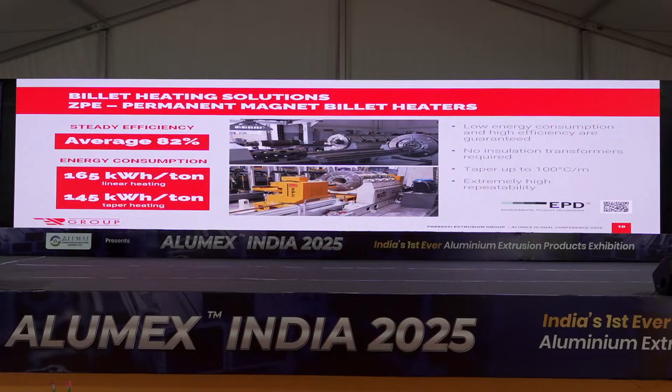The concept of this system is basically to create current inside the aluminum billet by moving, with a motor, the permanent magnet elements, poles that we install inside the motor. So rotation of the magnetic field around the billet creates such a current that by the Joule effect rises up the temperature and heats up the billet. That is a guarantee of uniformity of the temperature from the skin and also inside, so we can guarantee accuracy and very little difference between the temperature of the skin and the inside.

This is real data we take from production, measurement of the deviation of the temperature billet to billet. You can see the repeatability is within plus or minus 2.5 degrees. If you have further questions about this new technology, we can answer them later.

Then I would like to speak about one of our main products. Presezzi Group started manufacturing presses 30 years ago, and we continuously innovate our press. We are proud to say that our press integrates an energy saving system that is based on reducing energy consumption by using a different hydraulic system, a different concept of modulating the flow of oil on the press. That means lowering the energy consumption of the press up to, in some cases, 50%, which lowers the operational cost and makes a more sustainable extrusion process.

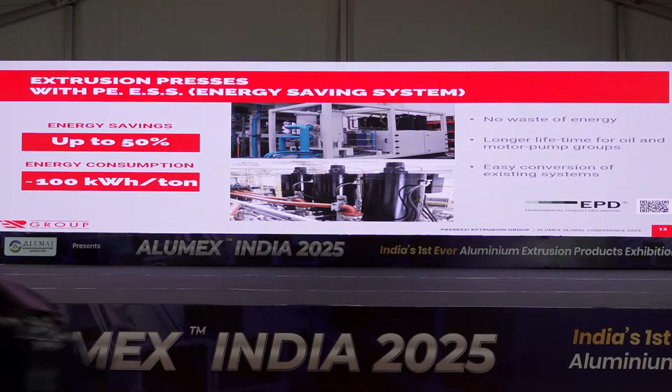So we have about 100 kilowatt hour per ton consumption of our press. It's a very compact solution, no waste of energy. The pump has a longer life because we are able, with this combination of fixed flow pump with a servo motor, to switch off the pump when it's not needed, and that increases the lifetime of the oil and also of the pump group.

Behind the press, we also design fully automated handling, packing, storage, including AGV robotic line. I believe that in the future this will be necessary also for the Indian market, to have more automated extrusion lines with the possibility to reduce, not now but in the future, the number of workers, and to guarantee a process with better repeatability, without failure, without scrap. Automation is a part of that.

Here you can see some of our systems for packaging lines, warehouse of profiles, warehouse of bundles after powder coating, ready for dispatch. We also have automatic packaging lines with robots that we have already provided to European customers.

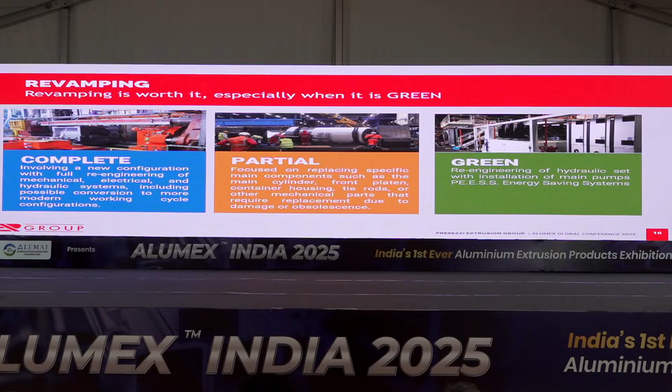Together with the design and innovation, we also keep constant focus on offering the customer upgrades for existing presses, where we can re-engineer and reduce the energy consumption. So we can offer press revamping with installation of energy saving systems on existing presses.

Revamping ranges from system upgrades to component renewal, PLC and software upgrades to the latest technology, and data acquisition, a system to control the process by adding sensors that monitor the machine in real time and store the data in a database.

And then, non-destructive testing for the structural assessment of the press and forgings. That's another service we can provide, for guaranteeing safety in the long term for your equipment.

Here you can see also a list of equipment that we can provide for offering a complete cast house: double chamber, single chamber melting furnace, smart camera system to monitor the aluminum bath inside the melting oven, fume treatment, refining, and casting launders.

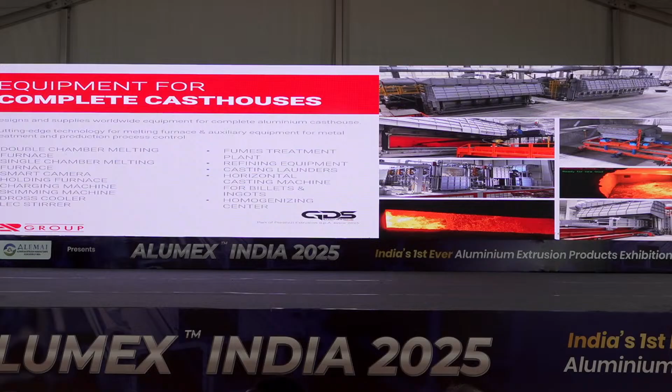This is all part of our product. We also offer, together with the extrusion line, automation software that we call Data Manager Suite, which is able to do data collection, planning of orders, raw material management, production tracking, order management, quality control, and process control. That's also something you must think about for the next innovation in the Indian extrusion line, and it's part of what we integrate in our offer.

Special focus on the service that is mandatory to maintain a relationship with the customer. We can offer service directly in India with our local specialists from Italy, USA, China, and Turkey, where we have different locations and bases.

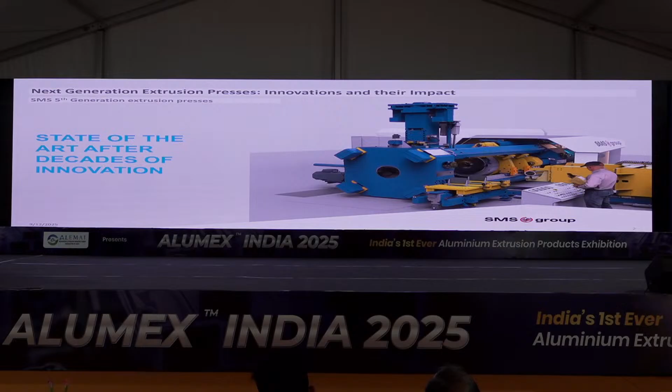On the right side of this presentation you can see our next generation presses. I will tell you how it is different from the older generation presses, and why we are calling it a fifth generation press.

Okay, so in order to give you a small glance of what we meant by fifth generation. This extrusion technology is quite old, but we are optimizing the process, streamlining it further in terms of better availability of equipment, reducing carbon footprint and energy saving.

If you go on the right side, the first technology was the backloading presses, called the backloading long stroke presses, in which the container goes on one side, the stem on the other side, and the billet is loaded in between. The total press frame was quite long, and that's why these are called backloading presses.

Then the generation improvised, and we came to know about the second generation of presses, called stem shifting. In stem shifting presses, the stem shifts to one side, but it is still a backloading press. However, the total length of the press frame is much smaller than the older version.

The third generation presses, which are still very popular in the market, is the front loading press. The advantage is that the billet is loaded from the front side, while the stem and container go on the other side, and you maintain the center line of the billet along with the entire center line of the extrusion press. So these are the three generations of extrusion presses very popular in the market.

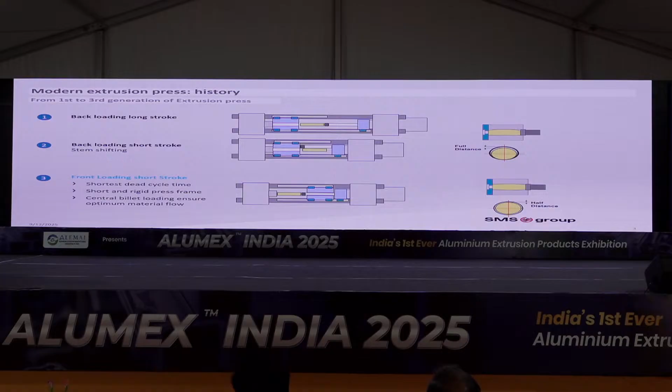In the past, we have worked on the fourth generation presses, and today I'm going to present the fifth generation presses as well. But let's talk a little bit about the fourth generation presses from SMS.

But before we go to the fourth generation, we thought, how is SMS unique from the rest of the manufacturers? So what we do in our presses is provide a complete laminated rod structure for the press, and this gives you an unmatched lifetime of the press instead of round nut and columns.

This means that over a period of time, the rods which you put into the press to make the frame as one unit have to be replaced. Also, in the thread configuration where the thread and nut are tightened, the area of contact is very less and the notch factor is very high.

In order to overcome that problem, SMS has come up with a unique design of laminated tie rod, and we put big keys which give a bigger surface and a low notch factor. So this is one of the unique features of the SMS press, which helps you get a more sustainable press.

We have been making these frames since 1970, and more than 600 presses around the globe are in working condition. The major point we want to highlight is that there is no breakage of this frame in the last 40 to 50 years.

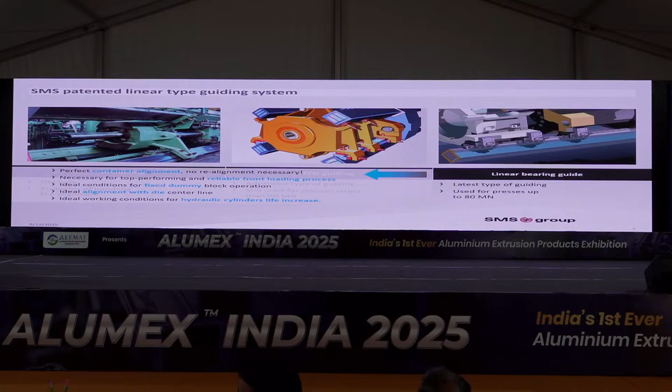Along with this, if you have this kind of system, you get very good central alignment with the dies, and you always try to use the core aluminum from the billet. So these are some of the advantages with our system.

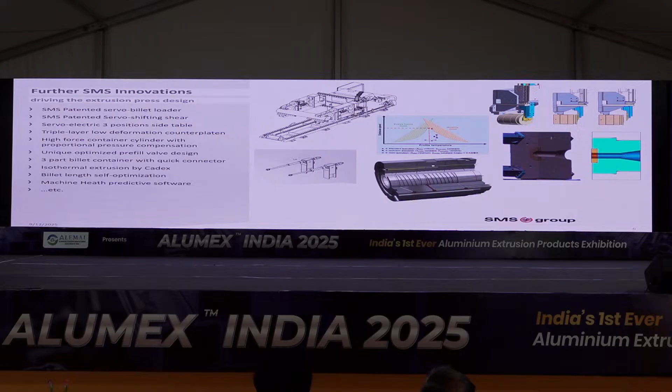There are some more advantages which I tried to put in a nutshell in this slide, but let's talk about a few, because I only have 20 minutes. Sorry for that. But if you want to know more about SMS presses, we also have our booth inside the exhibition, and you can come and visit us.

The major advantage with SMS is that we are not using linear guides only in the press, but also in the billet loader, as well as in the side cassette, so that the complete alignment of the press remains towards the central line of the press.

We would also like to talk about the servo billet loader. It's a latest development from our side, which is very energy efficient with precise control of the press. Along with that, we also have our servo shifting shears and our 3-position side table.

We also provide a pressure compensator and high proportionate force into the presses. Also, we have our in-house container designs, and we provide a software called CADEX, which stands for Computer Aided Direct Extrusion. It's additional software which helps you achieve isothermal extrusion while doing the extrusion. This software can be implemented along with the machine or separately.

So we have talked about the 3rd generation presses and their advantages, which SMS makes in-house. Now we will talk about the 4th generation presses, called Hybrex. Hybrex stands for hybrid extrusion, and it has some major advantages. The design is very compact, and we got the German Design Award for this press in 2017.

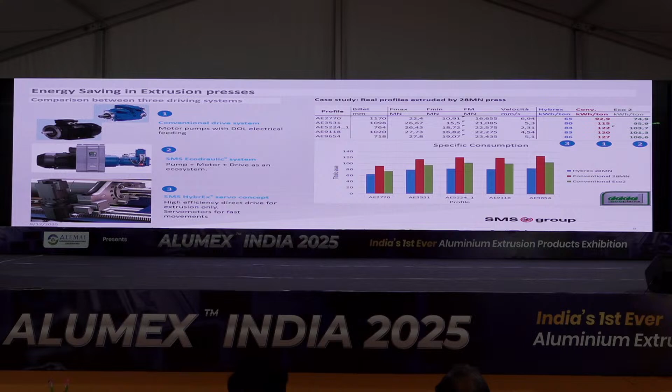The normal presses come with conventional drive, but we can also provide an SMS eco-hydraulic system on top, which can replace the old generation conventional system. This is a live case study for a 28 meganewton press across all 3 types of technology. In the middle, you see the conventional press; on the right is the eco-hydraulic solution, point number 2; and point number 3 is the 4th generation press with Hybrex.

If we compare a profile size of 1170 millimeter billet with 22.4 meganewton of force, with conventional presses the power consumption is 92.9 kilowatt hours per ton, whereas it's around 20% lesser in the eco model. And if you go with the Hybrex, it's around 30% lesser in that model. This is how we compare internally in-house, and we evolve the technology also.

So with this, I think the four generation presses are clear to you guys. But this 4th generation press with Hybrex, with the electrical movement, these presses were a little expensive. We got feedback from the market asking why we don't think of a combination of hydraulic and mechanical presses. So that's why this is a new development going on in SMS. The first prototype is ready and we have already filed the patent. We are just waiting for the patent to be confirmed, and then these presses will be ready for the market to sell. So what is the advantage of going with the 5th generation of extrusion presses?

In the past, we have seen that the press is always moving on the hydraulic system, and we have hydraulic working in the hot zone also, either the discard shear, the bolster shear, or even the side cassette. This is the hot zone wherein always the hot metal or hot aluminium is working. So what we did with the 5th generation presses is we tried to completely obsolete the hydraulic system in the hot working zone. The entire hydraulic system will be much smaller than the conventional presses.

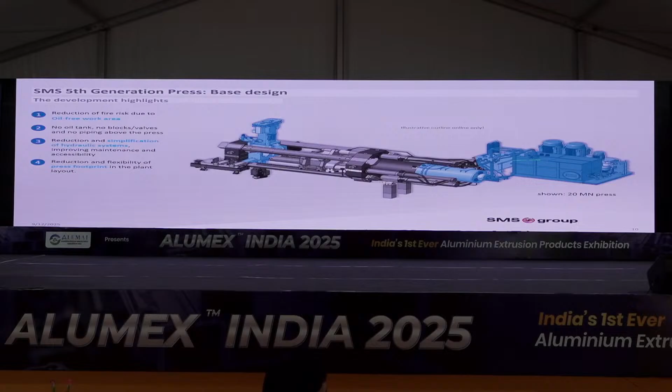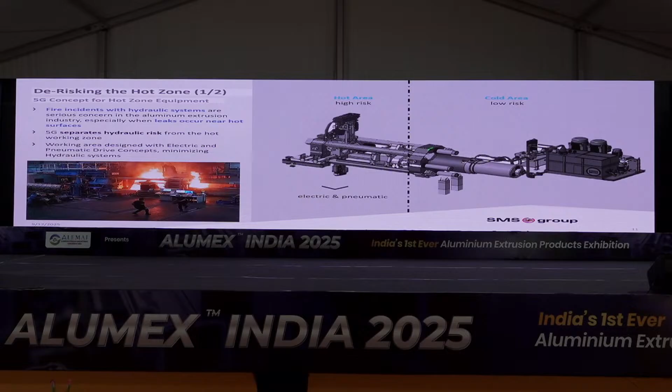That's why we came up with the idea and created a line. After that, there is no movement of oil wherein the hot aluminum metal is working. So we have made a cold area wherein the tanks, the side cylinders, the main tank and a compensating cylinder are working. In this area, we have come up with the idea of an electrical shear with a pneumatic push-off for the discard. On the bottom also, we are providing a similar type of technology, but this is optional. And also for the side changing cylinders, that is also an option - you can go with hydraulic or you can go with electrical drives also.

So as you can see, the idea is very clear: whenever there is a leak near the hot area, it has a tendency to catch fire, or you have to use an oil which is fire-resistant, but then the cost of investment for the consumer is very high because your OPEX cost will be very high in that case. So that's why we came up with this idea.

So you can follow the numbers 1, 2, 3 and 4. The first is the electric shear, wherein we have completely obsoleted the hydraulic cylinder from here and come up with the solution of the electric shear. This electric shear also has a pneumatic cylinder which can be used for the discard push-off.

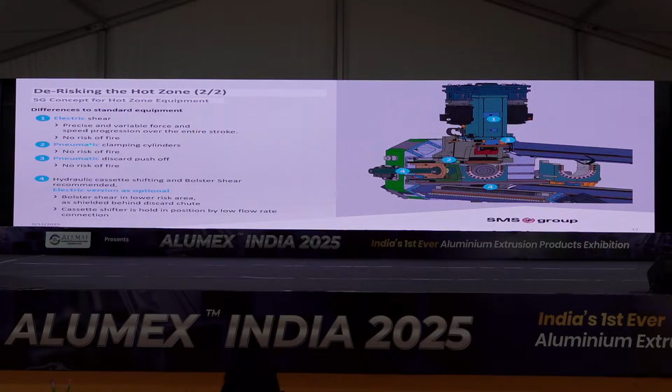Then we have the pneumatic clamping cylinder in this area for the dies. We are working on that technology right now. As I already explained, we are working on it and the first model of this press is completely ready, and we are just waiting for the patent to be confirmed so that there is no oil required for the die positioning also. When you take a shear cut, you have to hold the die against the clamping cylinders - that will also be completely obsolete.

Then the third is the pneumatic discard push-off, as I already explained - the push-off of the discard will be pneumatic. Then the fourth is an option, but we prefer that when you are investing in such equipment, you can also think of buying a bolster shear, which operates from the bottom, and also the cassette shifter.

So this is the mechanism of how we are operating the press. I will present this with the video.

We have a compensating tank on the bottom backside. This is used to pre-fill the tank, and the main pressure is coming from this pink pipe while the back oil of this compensating tank is going to the tank for cleaning. When the cycle is finished, the entire oil from this side comes to the compensating tank. We store it for some time before the next cycle starts. As soon as the next cycle starts, fresh oil from the pink pipe comes in, and the oil in the reservoir at the back goes to the tank for cleaning and cooling down. With this technology, we have a very reduced space, and the footprint of the machine is also reduced.

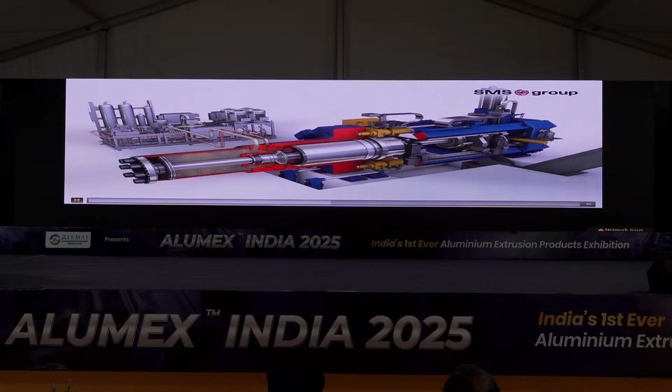Together with this, we are also working on making the tank smaller, but the efficiency of the tank has to ensure the oil is cooled and there is no turbulence in the oil. That's why we have divided the entire tank into three portions: one is our degassing chamber, second is our suction chamber, and third is our return chamber.

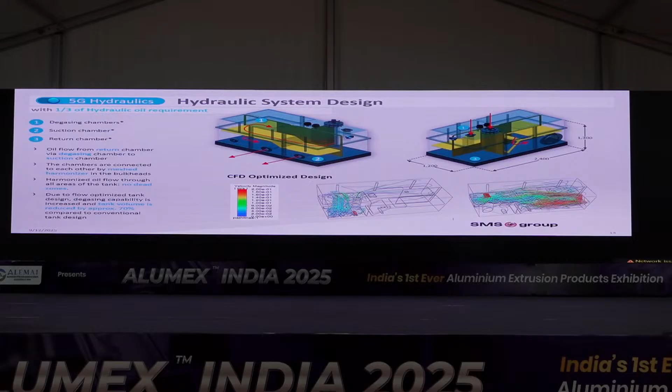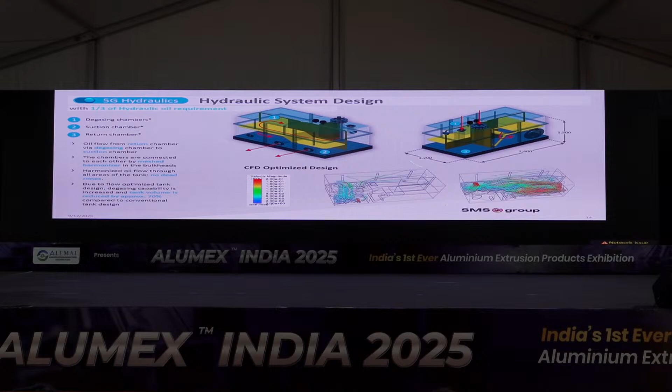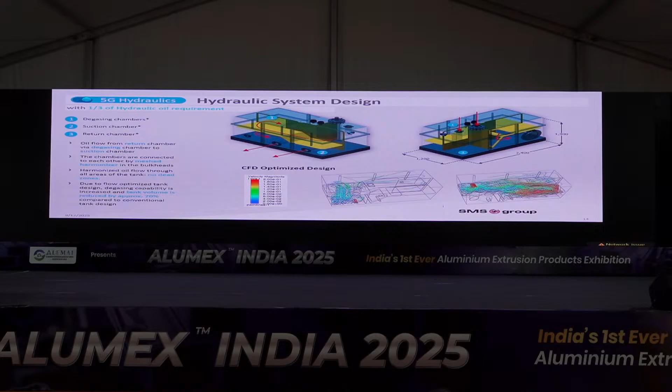When the oil is coming back and falling down inside the tank, it creates a lot of turbulence and bubbles. That's why all three chambers are connected, but the return chamber is separated by a membrane, so that the turbulence and bubbles of that falling oil will not go to the suction area, and no bubble will travel into the pipe which could cause cavitation later on.

So this is the complete thought process behind this: whenever there is oil, it first goes to the return chamber, then from return it goes to the degassing chamber, and from the degassing chamber it comes to the suction chamber. This is how we are working on this technology.

As I explained, for generation 3, 4, and 5, just a very quick glance about the layout. If you see the layout of a third generation front-loading press, there is a press area which is a conventional design, then on the second side there is a tank which is overhead along with railings and staircases, and third is the hydraulic drive system on the back side of the press. To overcome that big space requirement...

...this was the Hybrex design. Again, the tank from the top is completely obsolete, but if you see the side movements of the press, it's with the electrical drive. In this area, there is still some oil required for the shear, and the tank and pump station were quite complicated because we are dealing with a lot of pumps in this case and also with servo drives.

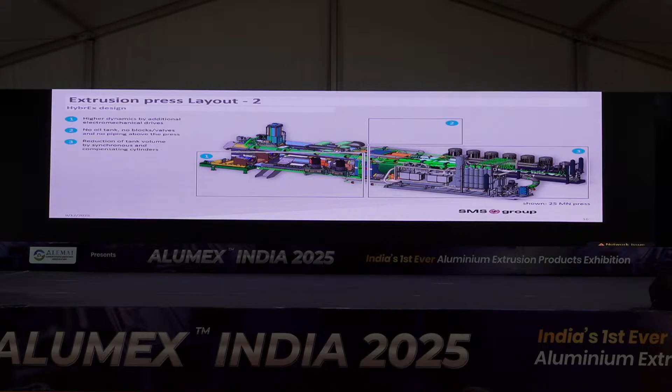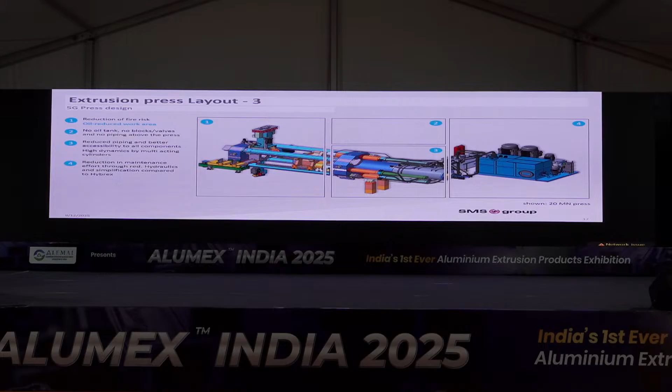So this was the fourth generation, and now we will present the fifth generation presses. In fifth generation presses, now you will see there is no tank on top. The hydraulics are much simpler, and the tank unit and valve stand are also much closer to the press, which gives better reliability and reduces the overall footprint of the extrusion press.

So this is the second-to-last slide in our presentation. As you can see, a normal conventional press with all this piping structure, valve design, and pump stations looks very complicated, whereas in a standard 5G press from our side, you can see this looks much easier to handle, with a small tank, a compensating tank, and electro-servo drives.

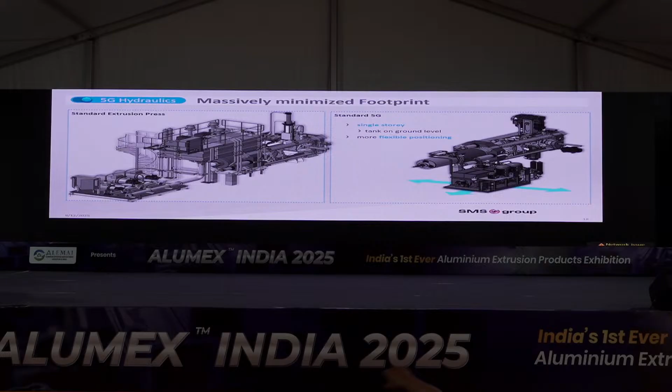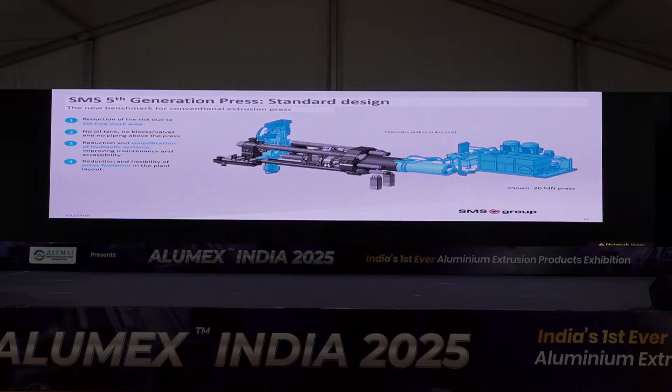I have already explained the concept. The first area is to work completely in an oil-free area in this press. Then there is no tank valve block on top, which makes maintenance very easy. With the reduction and simplification of the hydraulic system, it is very easy for maintenance, and operating the press is much faster. Overall, land is becoming a problem day by day and getting more expensive, so the overall footprint of the press will be around 20-25% less than conventional presses.

With these new Hybrex or Hybrex 5G presses, there are options we provide, such as further reducing oil-related equipment by replacing the side cylinders with electrical drives. Also, you can use the high efficiency of Hybrex technologies, meaning the hydraulic system of Hybrex can also be put into these kinds of presses, and you can enjoy the shortest dead cycle time ever in your presses. Dead cycle time is basically the non-productive time for an extrusion press.

So now, as soon as I click the button, you can see what I meant with the new Hybrex. You can obsolete these cylinders from the side, and the movements will be from the electrical drives in this case, which will further reduce the hydraulic oil consumption in the overall press.

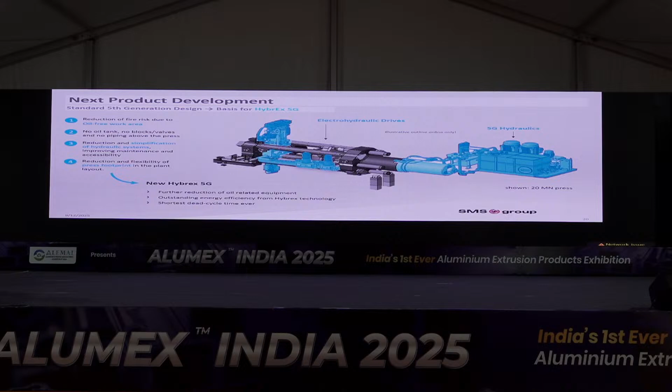So in a nutshell, what we want to say is that we already have state-of-the-art SMS standard presses along with the Hybrex model. But in combination of these two presses, you can pick and choose and make your own 5G recipe, whether you want to go for standard 5G presses with the hydraulic system, or if you want to obsolete the hydraulic system for the side cylinder and container shifting system, you can also choose that as a Hybrex 5G.

So we provide complete full flexibility when you are choosing the options. With this entire system, there is complete de-risking of the hot zone, meaning the oil and the hot metal do not come into contact, less hydraulic complexity, improved footprint, meaning overall you get a very proven and state of the art design from SMS Group.

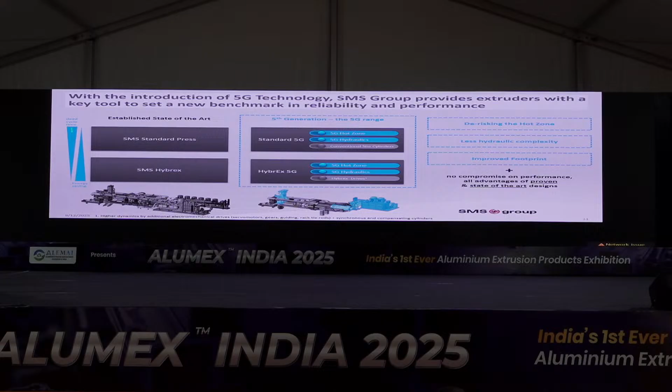And in terms of dead cycle time and energy saving, the better solution you choose, the less will be the dead cycle time and the more will be the energy efficiency.

So with this, I end up here with the presentation. Once again, my name is Mohit Agarwal from SMS Group. And if you have any questions, please feel free to ask me. Thank you very much.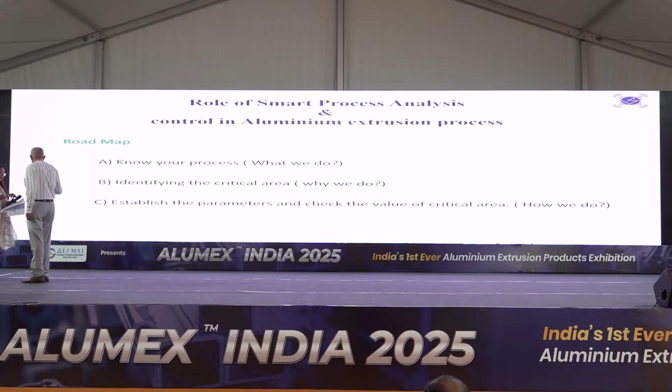You're okay with this? This is quite loud. This is the person. You can move this.

Good afternoon to all. Today we will discuss total data analysis and process control systems in the extrusion industry for extrusion industries.

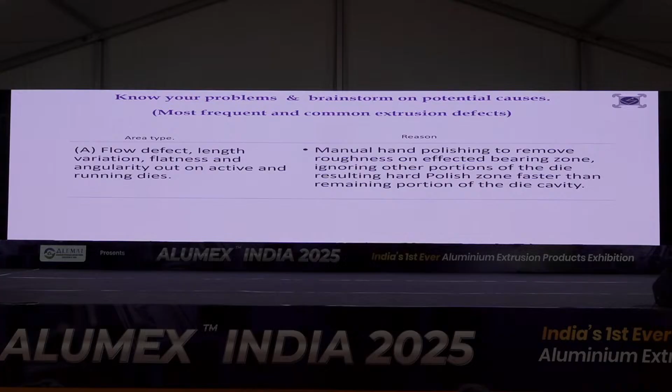So we have to avoid that. How we avoid it depends on the infrastructure of that particular extrusion plant. I'm not going into that part, because many extrusion plants may not have that, so they will look for other alternatives.

Next, relief exit—that is the most important thing to follow. Whatever we see as a joint mark, we call it a joint mark, but it is not really a joint mark. The joint is from the billet at the back of the die. What joint mark we find on the runout, extrusion runout, it is practically an oxide deposition or build-up just beyond the land area of the dies.

And if that land area is not very deep or adequately deep, then what happens? The same oxide rubs on the constant flow of the die, the product. So we have to be very careful on the relief exit also.

Second thing is bearing land area is not blended and is very sharp. When we cut a die, usually we try to balance the flow with the resistance. And that resistance we create either from the feeding side, feeding pocket side, or porthole side, or by increasing or decreasing the bearing length. So when we have a very abrupt change of bearing length, that blending is very, very important.

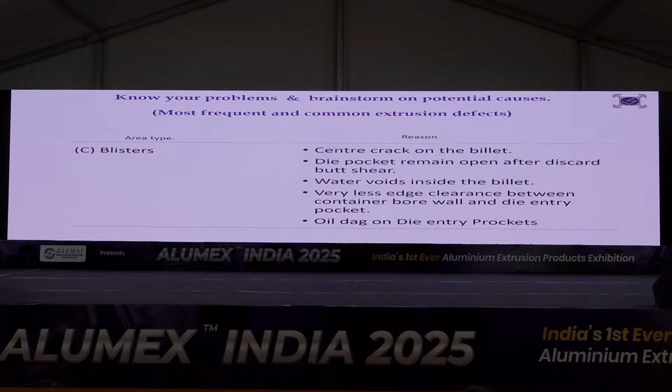Then we found the blistering problem. Blistering problem is very unique. We all know if there is an air interruption or entrapment, there will be blisters. So where does the air come from? We need to know the potential areas of air entrapment.

Center crack of the billet is the main culprit, the major culprit. Whenever we cast a billet, we look at the billet surface, but rarely do we have a look at the billet core area. Apart from finer grains, the center crack is also important. So we have to check, at least batch-wise, one billet from each batch of casting from the bottom, to see if there is a center crack—if so, we should not use that billet.

Now why are the cracks coming? That is a different issue, not covered here. If anyone is interested to know, we will discuss it later after this presentation.

Then the die pocket remains open after shearing. When your shear blade condition is not good, or there is a gap between your die and shear, or your die is shaking, or your discard is very long or very short, sometimes part of the pocket gets opened. And when the next billet tries to enter in that gap, there is air entrapment—that also gives you the blister problem.

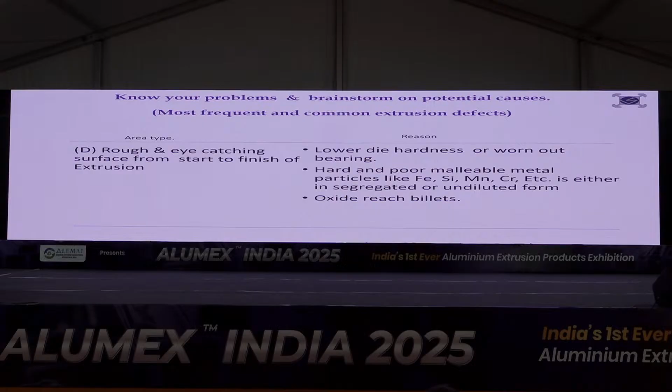That gives the most serious roughness problem. Oxide rich billet is another contributor. That's why during DC casting, whether with classical hot top or air slip, the oxide layer should be very thin on the outside wall so that the oxide part doesn't extrude through the die. Because aluminum oxide is abrasive by nature, it will create further roughness on the die bearing area.

Next comes metal tearing or crocodile cracks. In common language in our country, everybody says shearing, shearing, shearing. Shearing is what no one knows. They think the material is not bonding, so they just say shearing.

Shearing can only occur due to incipient crossing, beyond the incipient temperature level, which is around 80-85% of the basic metal melting temperature. At 70 to 72% of basic melting temperature, if we apply, the metal goes to plastic state. But the moment it crosses 80-85%, it reaches the incipient melting stage and the metal becomes a bit brittle, tending to lose its malleability.

Now there can be a question: if you preheat the billet at 490 or 480 degrees Celsius, how does it become more than 560, 565? It's because of constant friction in the container that escalates the temperature, and this escalation happens at the bearing point, which we call the exit temperature. That exit temperature should not cross 80-82%, 80% at least as a thumb rule.

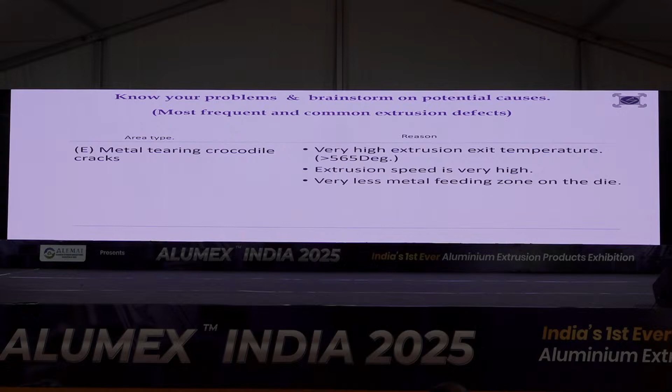Twist and bend, very simple. Either you don't do proper stretching or your die flow is bad. Sometimes the die runs faster on one side and slower on the other, and that will surely give you a twist and bend problem. Press alignment with reference to the stem versus container is another contributor.

If the stem is rubbing against the wall of the container, the inner wall gets damaged. That is one issue - your dummy block is getting worn out. That is another problem. But the biggest problem is if you have a constant drop on one side, the stem cannot give concentric force, concentric pressure to the die for exit.

Just like what we see every morning - if we press a toothpaste tube from one side, the toothpaste doesn't come out concentrically, it comes out leaning one way or the other. So if that happens during extrusion, it becomes very difficult to control in the stretching. Many people say that a detwister in the stretching machine can fix it - that's wrong. You just can't use the detwister in a stretching machine based on visual estimation.

You cannot do it. So it's a consolation, self-consolation that we have a detwister, let it be there. We compromise with that.

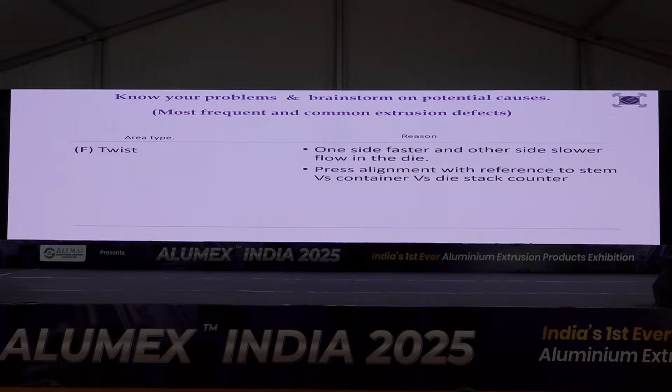Bend and bow across the length, that is again inadequate stretching. But why do excessive bends and bows occur? Sometimes the die will run upwards, sometimes downwards. So this way you are giving a formation of a bend or bow by default, and thereafter you are asking your stretching person to do hard stretching or more stretching. If you do more stretching, that is another problem. If you do less stretching, this will come.

With more stretching, you can have orange peeling problem on the surface. You can have dimensional problem. You can have deflection problem. You can have many more problems. And your stretching, lead, receiver and transmission - head is the transmitter and tailstock is the receiver. So that receiver and transmission area will be more. So there will be more deflection, longer deflection, and you have to cut out that portion. Recovery will go down.

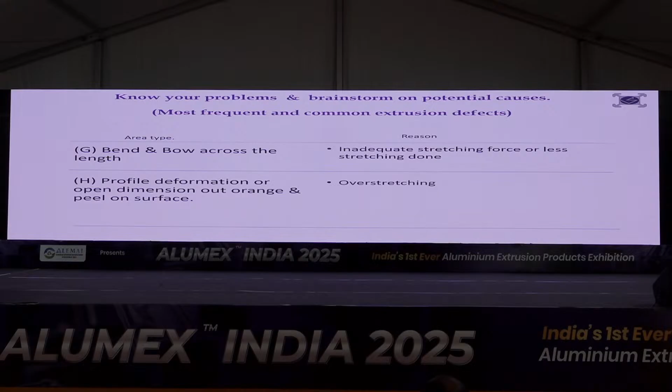Profile deformation, I have already discussed. Black patches, dents, and damage on the profiles. Most of the time, runout itself is bad. Roller belts are dirty, oily. Somebody uses graphite pieces and presses it.

Better correct your die, don't do like this. These are not the die correctors. Your die corrector is employed and he must do it. You must make sure the extrusion comes out absolutely straight from the press mouth. You cannot run it with compromise lifelong.

Now, when you know all these potential causes, where exactly are those contributing? Because we all know for extrusion, we need billet, we need die, we need extrusion line, and we need process inspection system also.

So just divide those into these segments and entrust a person or a team to check separately on these segments, so that at the final delivery there will be no checking. There should not be any rejection. If you reject at the billet stage, at least 1 to 3 stage expenses are saved. You can take quick decision, and next time you go back and take care over there.

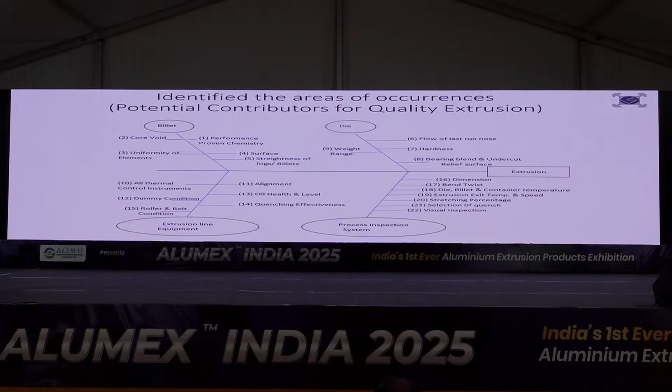Adverse effects of variation, potential contribution areas - that is rejection due to non-standard chemistry. Sometimes the chemistry goes out, and it's just run anyway. Rejection due to random blister, we have already discussed. Variation on tensile hardness after age precipitation.

This is another area of concern. Most places have double rack aging systems in batches. So the entire aging oven has to have equally balanced thermal management system so that the entire furnace has the same temperature, or more or less the same. If one rack is overloaded and another is underloaded - one rack loaded with heavier profiles, another with lighter profiles - so one rack weight will be around 2 ton, 3 ton, and another will be 1 ton, 1.5 ton.

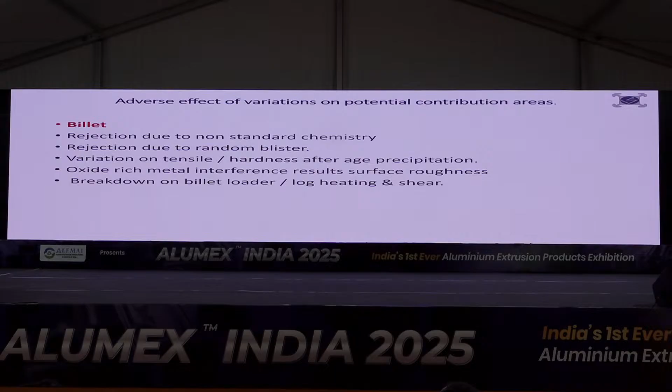So there will be variation, and that has to be taken care of. At least both racks should have the same weight so that the temperature distribution and precipitation cycle is not disturbed. Rejection due to random blister - oxide-rich metal interference results in surface roughness. Oxide-rich is another perennial problem in the billet. If your billet is more oxide-rich on the wall side and you are maintaining the same discard length,

by default the oxide-rich metal will pass through the die and you will have some oxide patches. Then breakdown on the billet loader - if your billet is bent, that can seriously cause a major problem in your billet loader and log heating shear. So there also you have to take care.

Once these areas are covered, these are all basic areas. There are micro areas also. This is where today we're discussing at a macro level to understand. If we take care of these areas, we will definitely get good billets on the extrusion yard.

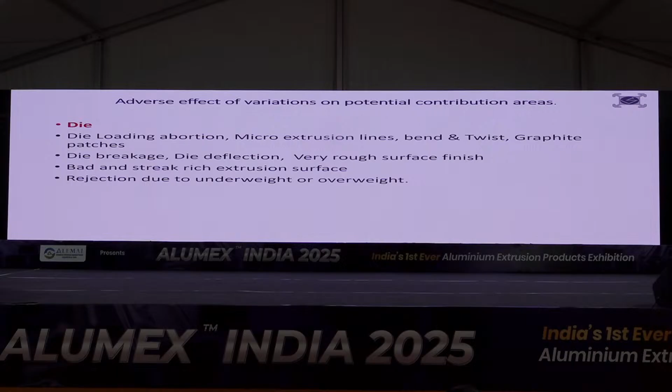Extrusion lines, we have already discussed, no explanation is needed over there. Everybody, we have been suffering for this for a long time. Flashing during extrusion and flow defects on dies, another major area of concern. Whenever there is a flashing, the dead cycle time goes very high, and the die also gets endangered.

But still we compromise with the old broken face container or deflected die or hammer marks on the die. Frequent time loss and breakage of stem - breakage of stem is another area of concern. Whenever there is a breakage of stem, people say the stem steel is bad, the stem is soft, this, that. If it was bad, if it was soft, why you did not check it earlier?

Basically, these are align problems, stem breakage. And another problem of stem breakage is jamming of your fixed dummy after the extrusion when it is being taken back by the side cylinder. Then uneven speed of extrusion, oil seal failures, pump failures - this is another area of concern.

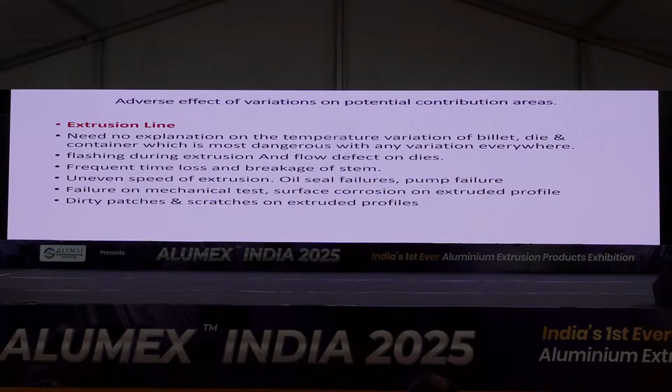Uneven speed of extrusion, mainly due to either crispy billets or low temperature billet or very high temperature billet. Very rarely it happens due to air entrapment in the hydraulic system and all. But mostly it is due to billet or oversized dummy. If it is oversized dummy or there is a bellied container - front bore is say 200 millimeter, rear end bore is say 200, 199 millimeter, and at the middle you will find 203 millimeter bore. So there will be uneven speed automatically, because either somewhere it will get stuck, the dummy will get stuck, or somewhere it will release and move faster. So next area is failure in mechanical test, surface corrosion, and on extrusion profile.

Wherever you compromise with the potential contributing areas, you can have this problem - dirty patches, scratches everywhere. Process inspection system, when we go there, we see outright rejection, we see die breakage, mechanical test failure. Over stretch - profile deformation. Profile is deformed, it is cut, still it is cut up to the designated length and delivered, no one checked. Wrong quenching media selection, rough, dent and damage extrusion surface - just pack it, load it. So if we compromise all those earlier areas shown in that cause and effect diagram, we will have this problem every day.

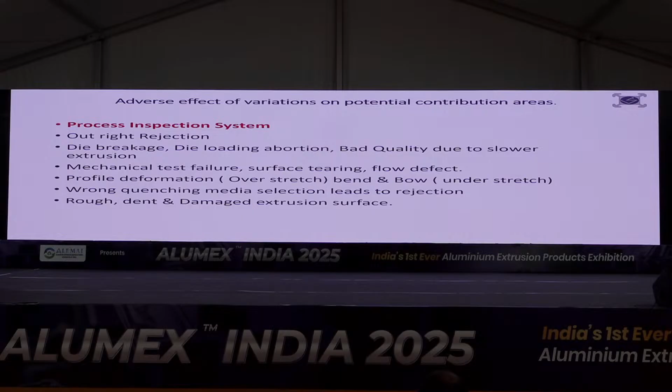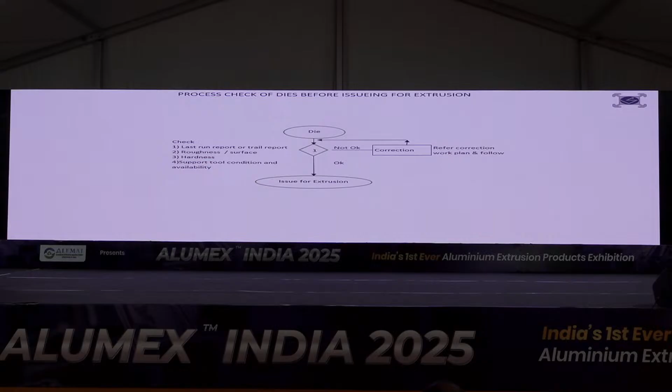When you have a flow defect, please refer to the nose. There, if you see a flow defect, it must be due to faster flow or slower flow. So wherever you see there is a slower zone, 3 sides are slower, 1 side is faster.

Our die correction concept is always to go for either direct welding on the die plate or bearings, or they will reduce the die bearing elsewhere. That's all, you correct this way. It is not a good idea to reduce the flow on the faster side. Better you increase the slower zone so that your extrudability and productivity goes higher.

Roughness of the surface - what we do in our plant, we don't do any file polishing. We don't allow it, in fact I don't have any die corrector. We don't allow our dies to get polished with a diamond file. We use extrude hone, but not many people can afford or have extrude hones.

At least when you have a polishing thought in your mind, instead of hand diamond polishing, just measure the roughness - say 1 micron roughness is there. You give 2 micron of re-wirecut all over. Just do re-wirecut, and then do soft polishing to get the blending of the bearing.

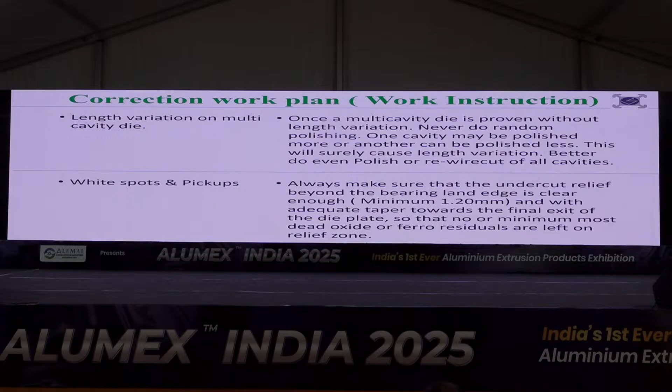There will be no polishing, or very soft polishing, so it will run fast and slow. So better, if you are planning for a hard polish of a particular cavity, you do re-wirecut of all cavities equally - 1 micron, 2 micron. If you think that if we polish our die, life will be reduced...

...your die life is already reduced with this - 10 bad runs, and recording your dies saying 'my die is running since last 6 months or 6 years.' How many times it delivers and how much quantity it delivered, that is the die life. People will roughly say 25 ton input, but that doesn't mean you got an output of 22 ton - no, it may be 20, it may be 10 ton also. Many times unloaded due to this length variation problem.

White spots and pickups - again, the relief undercut of the bearing. If there is less bearing, there will certainly be a huge deposition of aluminum oxide, and determination is very easy - just feel the joint mark of your extruded profile. If it is very smooth, you are sure the undercut is very less, and you will definitely have oxide rub on your extruded surface during extrusion, because when the puller is pulling it, there is micro shaking all the time, and softer extrusion will touch or rub with a harder oxide build up.

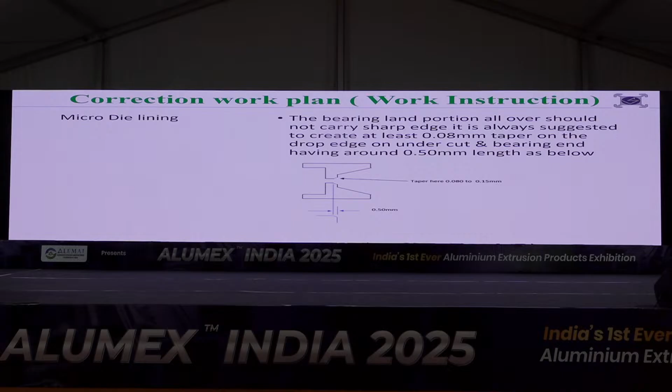Streak and patch marks: try to make the blend on the die bearing with the abrupt change that we have discussed.

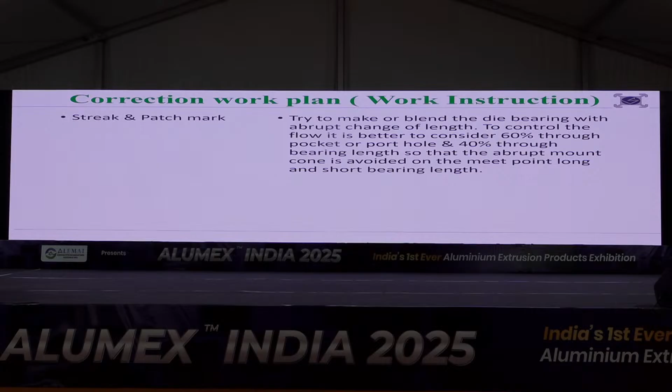Flow: if you want to really control the flow, give 60% weightage to your die pockets or porthole and 40% weightage to your die bearing, so that you are not stuck with a static pocket and dynamic bearing. Partially static, partially dynamic pocket, and partially static, partially dynamic bearing blending is more scientific. Instead of 10 millimeter bearing length or 5 millimeter bearing length versus 6 millimeter or 3 millimeter bearing length blending, better you go for 3.5 millimeter bearing length and 2.5 millimeter bearing length versus a larger pocket. That is much better. You can avoid streak and patch marks that way.

Then we come to the billet casting area. Same thing, check chemistry is there. Most people do that. Somebody compromises, somebody doesn't. Then metal treatment, another area of concern.

We don't bother about temperature and all. We talk about degassing and all. We do research on metal degassing without knowing why the hydrogen gets entrapped in molten metal. In cold metal, there is no entrapment. The more you give temperature, the more hydrogen pickup there is.

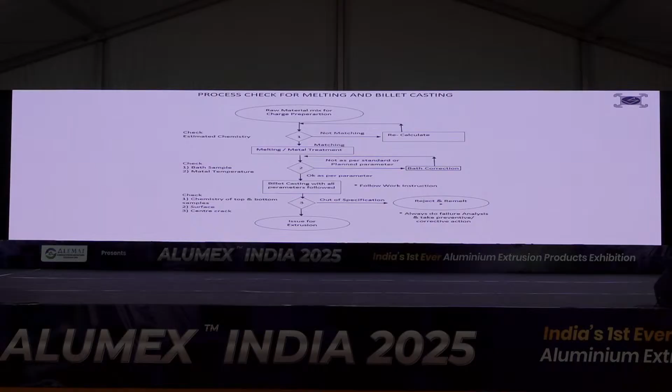After solidification, there is only porosity. Hydrogen is not there. There will be air, if at all something is there, but hydrogen is not there. So you reduce the temperature and release the hydrogen. That is why people do exothermic treatment and all, either with a gas, inert gas, or with some chemical, whatever you do. But why increase the temperature? You monitor your temperature so that your consumption of exothermic chemical or inert gases becomes less.

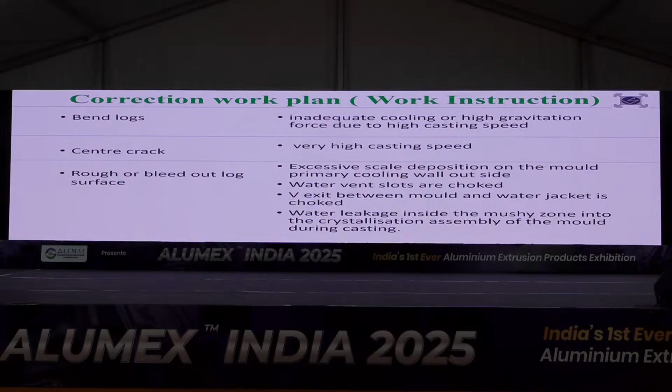When you are casting, you have to check all these things: bend logs, inadequate cooling, or high gravitation force due to high casting speed. The log will definitely get bent. You fix it, fix the parameter. It is your plant, you have the data. You analyze and fix the parameter.

Center crack, very high casting speed, rough or bleed out log surface, excessive scale deposition - we don't check it, you check there. Your quality is automatically controlled. Next.

Uniform molten metal temperature - whatever is in your furnace doesn't matter, it matters most in your casting tundish. You design or locate your furnace at a distance so that when it reaches your distribution tundish, it should not cross 695, 696 degrees. Just that margin, your casting quality will be better. To control that, you naturally have to control the metal temperature inside the furnace. We all know top and bottom temperature variation is there, mostly around 30 degrees from top to bottom. You do that over there.

Then water temperature, another issue. Beginning of the casting, very good billet surface. End of the casting, the log gets bent.

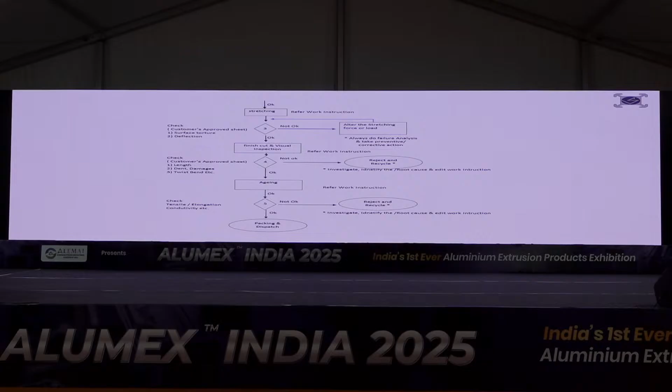These are the typical process flow to maintain, and this is available - I think this is available with the ALEMAI technical committee. You can send them a request, they will send you a copy.

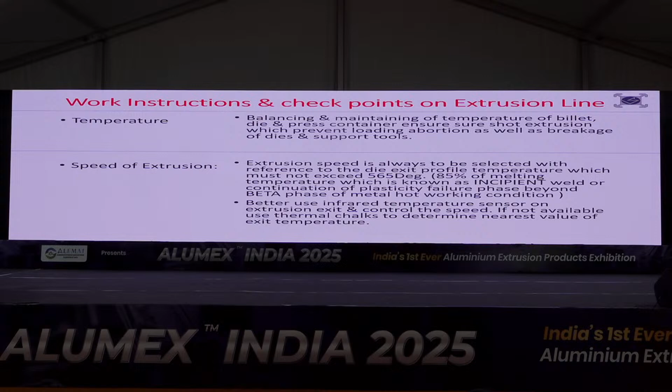These are the work instructions in the various stages, what is shown in the process flow diagram. You can even take a photograph. You can request them to scroll one page after another and take photographs. I'll give you some time to read and take the photograph.

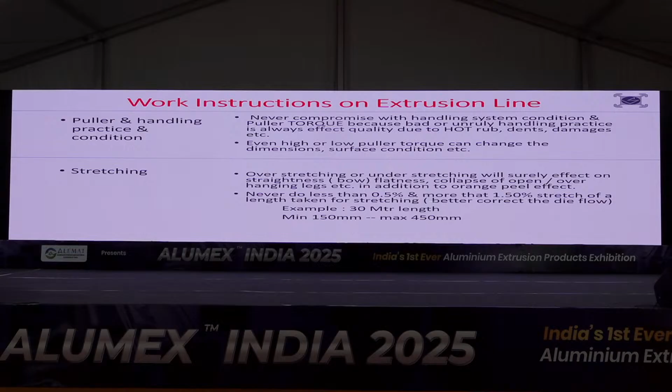This is a very important area. Now, how will you define 1.5% stretching? It's very easy. You have a 30 meter length of extrusion. Just place it, hold it with your head and tail stock, look at your stretcher pressure gauge, and from there you start measuring.

If you want to do 1%, that's 300 millimeters. Allow your headstock to travel 300 millimeters. And if you can afford it, you can put an encoder and a pressure sensor - it will be very easy. Why depend on an ultra skilled person who knows stretching? No one else knows, he is on leave, that is why this has happened. No, it should not be like that.

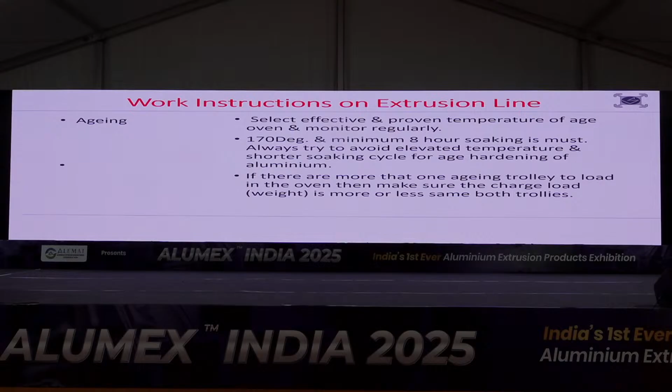Then aging, we have already discussed. Most people go for elevated temperature and short cycle - it will not save you money. Surely, almost 80% or 50% of aging will need or require a re-aging process. And after re-aging, we get surprised - either the hardness has gone down or it is not achieving further. Do not do it, follow this. It will give you better results and save your reprocessing time.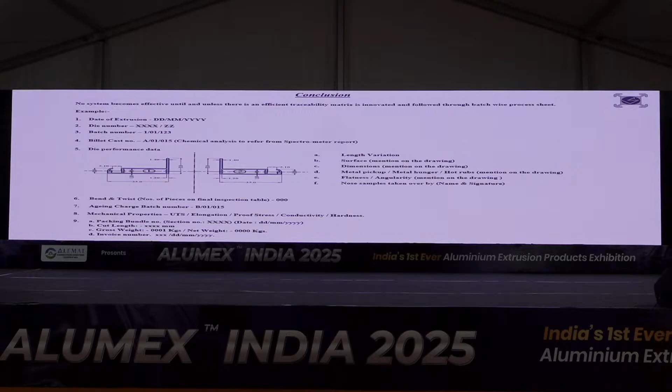This is a typical job card, history card, or whatever you call it. You should make a job card like this and collect data. For your academic interest, most people find black patches or some kink mark. There is a solution, and most Gujarat-based extrusion plants who do this in a big way have solved it. How they solved it, I can share that story, but they have solved it. Or you can talk to any Gujarat extruder, they know.

The trick is in this area, this wall, as we discussed earlier - this should be thicker than this wall. There should be a break, just like when a river meets the sea at a confluence, this becomes wider, the color change becomes wider at the confluence. Here, if it is the same, you have to have some difference in the thickness.

The problem is we take a piece, measure it, give it to a draftsman - measure and make a drawing, you make a die, all over thickness same. No, just be careful on these areas. And do like this, you get all data available run after run. Refer all data, go back and do correction. That's all, thank you very much.